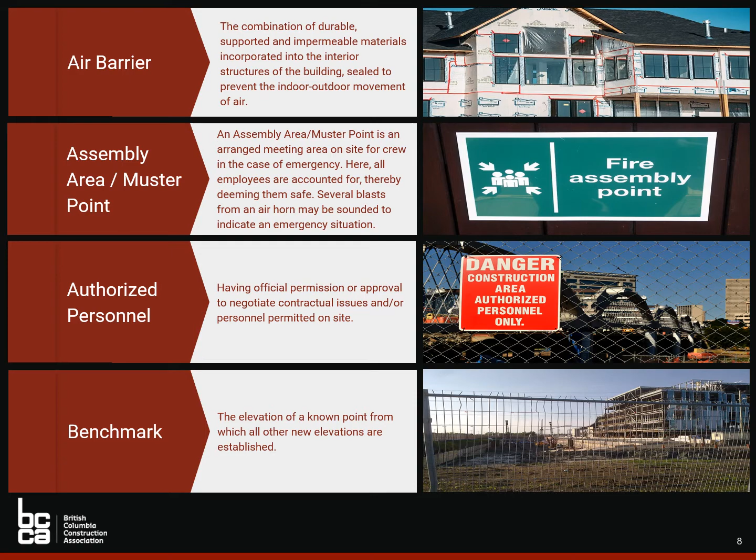Benchmark: the elevation of a known point from which all other new elevations are established. Batter board: a board set adjacent to an excavation and used as a reference point to level and align the work.

Building envelope: a physical separator between the conditioned and unconditioned environment of a building, including the resistance to air, water, heat, light, and noise transfer.

Building inspector: construction and building inspectors ensure that construction meets local and national building codes and ordinances, zoning regulations, and contract specifications. They also inspect electrical, plumbing, foundations, and all aspects of construction.

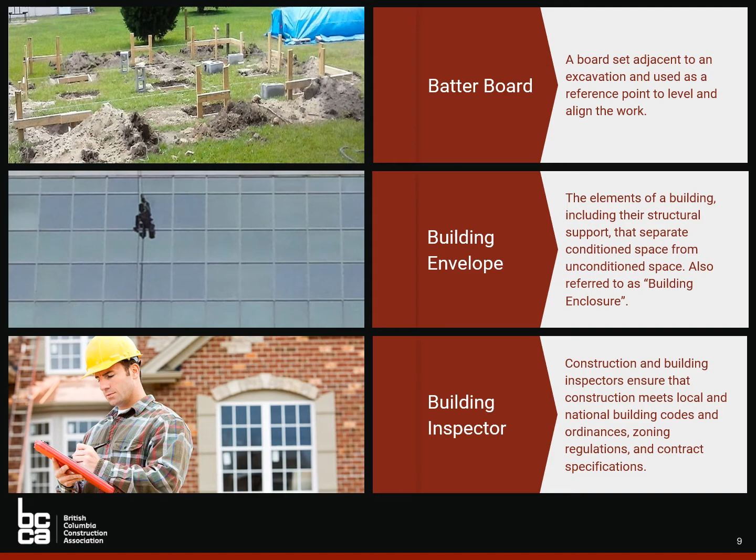Catch basin: a subgrade chamber usually built at the curb line of a street for the admission of surface water to a storm sewer or subdrain, and that has a sediment sump designed to retain solids and other deleterious materials.

Conduit, electrical: a pipe, usually metal or PVC, in which wire is installed.

Curtain wall: a thin wall whose weight is carried directly by the structural frame of the building and which supports no vertical load other than its own weight.

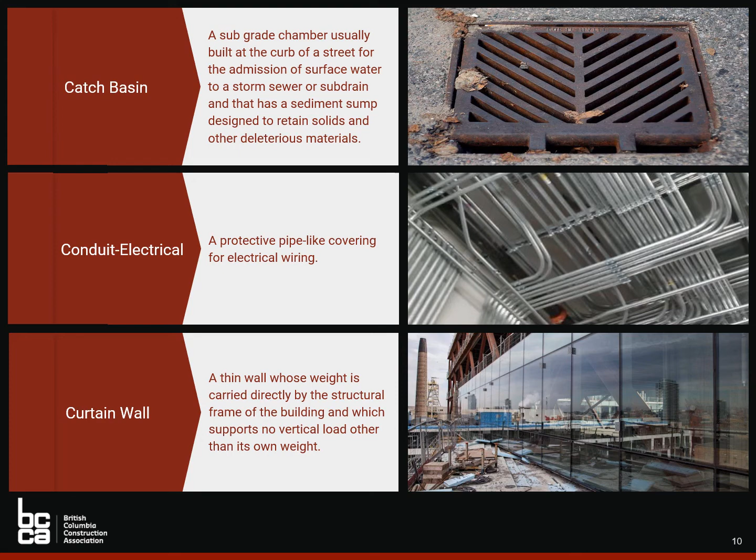Datum line: in surveying, the baseline from which all lines or levels are taken.

Elevation: the two-dimensional face of a building represented on architectural drawings, typically the east and west end elevations. Also, the reference to height or contour in relation to datum.

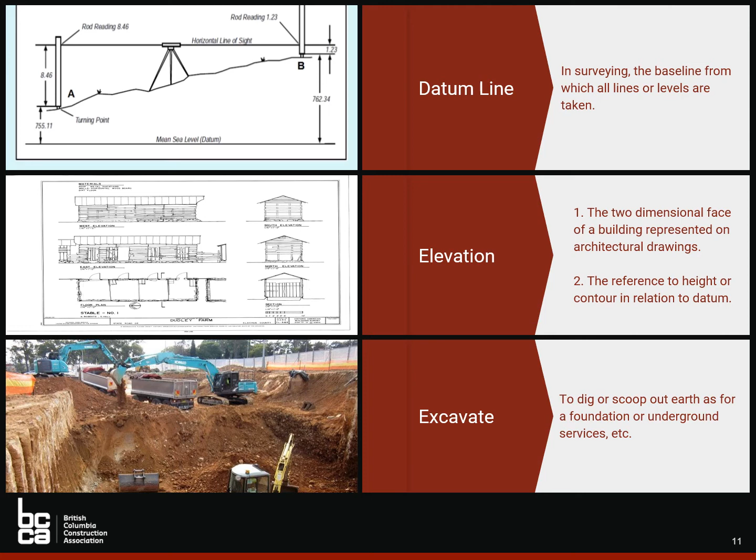Excavate: to dig or scoop out earth as for a foundation or underground pipeline.

Foundation: the supporting portion of a structure below the first floor construction, or below grade, including the footings, typically buried at a depth to avoid frost effects.

Framing: lumber used for the structural members of a building, such as studs, joists, and rafters.

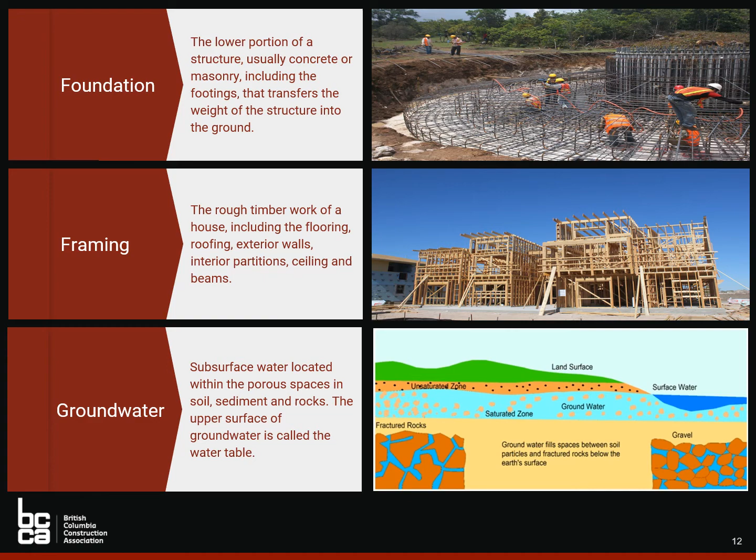Groundwater: subsurface water located within the porous spaces in soil, sediment, and rocks. Groundwater originates from rain and melting snow and ice and is a source of water for aquifers, springs, and wells. The upper surface of groundwater is the water table.

HVAC, an abbreviation for heating, ventilation, and air conditioning.

Load-bearing wall includes all exterior walls and any interior wall that is aligned above a support beam or girder, normally any wall that has a double horizontal top plate.

Non-load-bearing wall: a wall supporting no load other than its own weight.

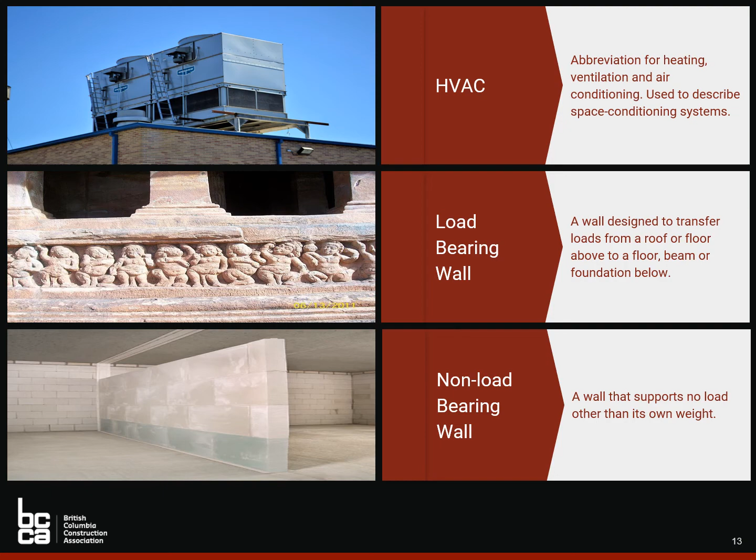Lockup: the stage of residential construction at which point the walls, windows, and doors are in place so the structure may be secured prior to finishing the interior.

National Building Code is a set of rules that specify the standards for constructed objects such as buildings and non-building structures. The main purpose of building codes is to protect public health, safety, and general welfare as they relate to the construction and occupancy of buildings and structures. The building code becomes law of a particular jurisdiction when formally enacted by the appropriate governmental or private authority.

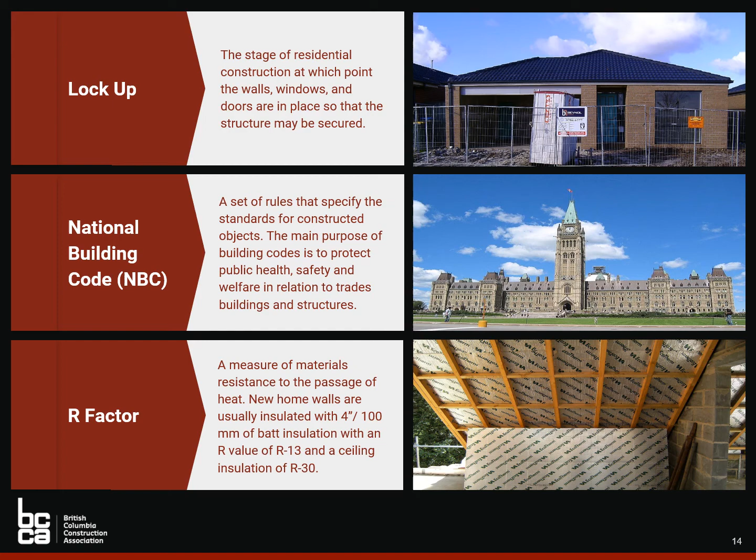R factor: a measure of insulating materials, a value given to building materials resistant to the passage of heat. The higher the R value, the more insulating power it has. For example, typical new home walls are usually insulated with 4 inches, or 100 millimeters, of batt insulation, which has an R value of 13. Ceiling insulation, which is thicker, has an R value of 30.

Reinforcing, reinforced concrete: concrete to which tensile bearing materials such as steel rods or mesh is added for tensile strength. It is used in concrete floors, columns, and beams, as well as suspended concrete slabs.

Reinforcing mesh, or welded wire mesh, is a grid of welded steel wires used to resist tension stresses in concrete slabs. Reinforcing steel are the steel bars used in concrete construction to provide tensile strength and come in various diameters.

Rough-in: the installation of plumbing, heating, electrical, and other items that will be covered in later stages of construction.

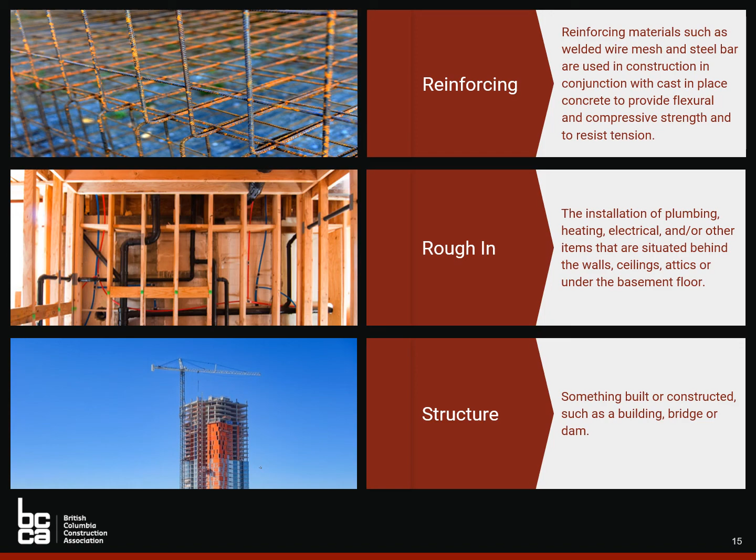Structure: something built or constructed, such as a building, bridge, or dam.

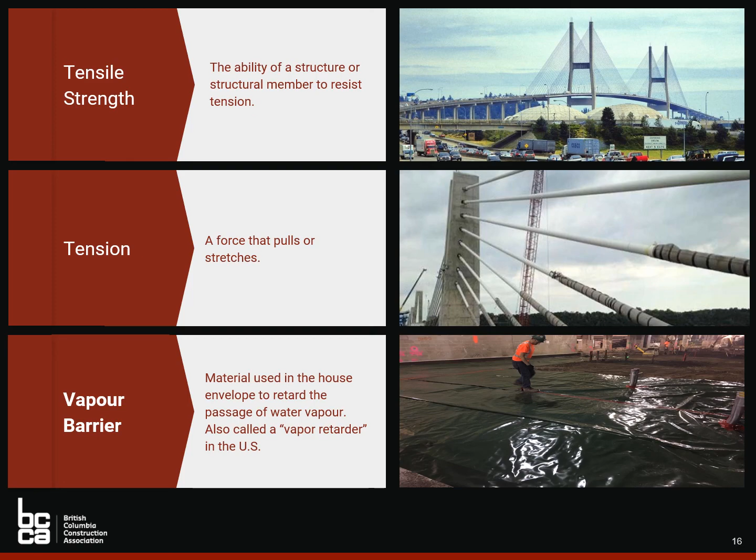I hope you enjoyed this webinar on construction terminology.